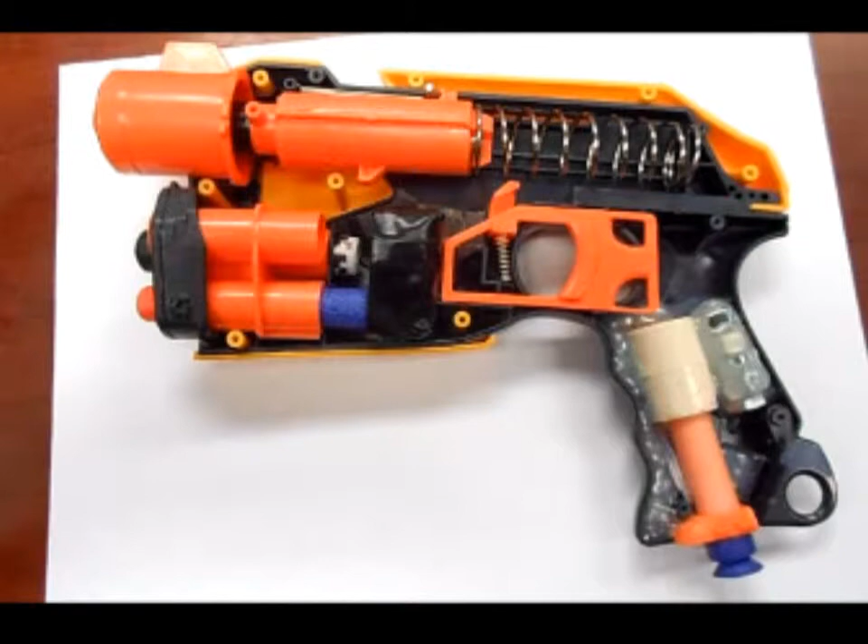Most of my how-to videos are taken while I'm doing each individual step, and then I put them all together into compilations later so you can see step by step how I progress from one step to the other and complete the entire blaster. In this particular case, this mod was done well before I ever started recording videos, so I'm taking it apart and reverse engineering the project I did.

I want to point out two things. The dart tag line is known for having extra plastic shells on the blasters. Once you remove them, other screws tend to be hidden below them. Underneath the priming slide is a screw you have to remove, as well as one up here under the forward piece of plastic, so you need to make sure you take those out as you go through this blaster.

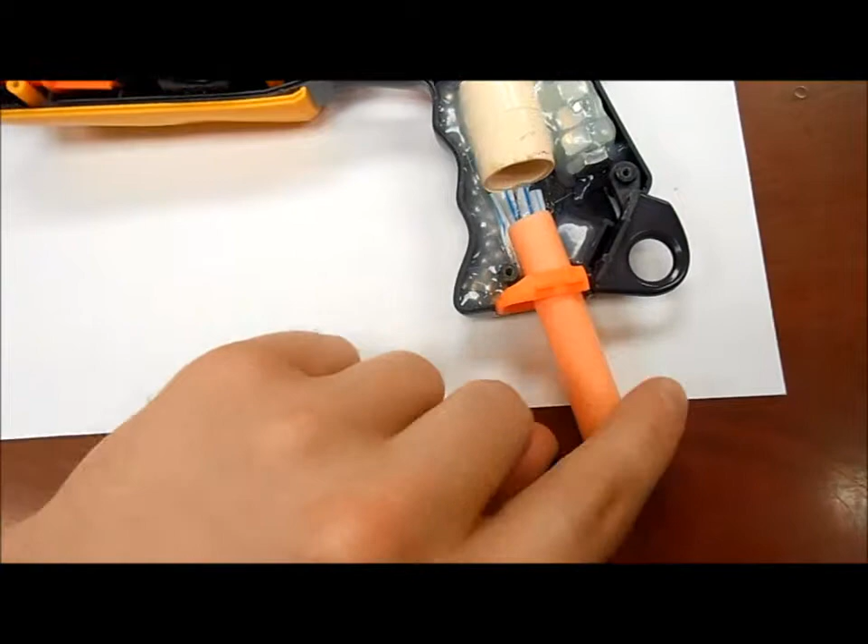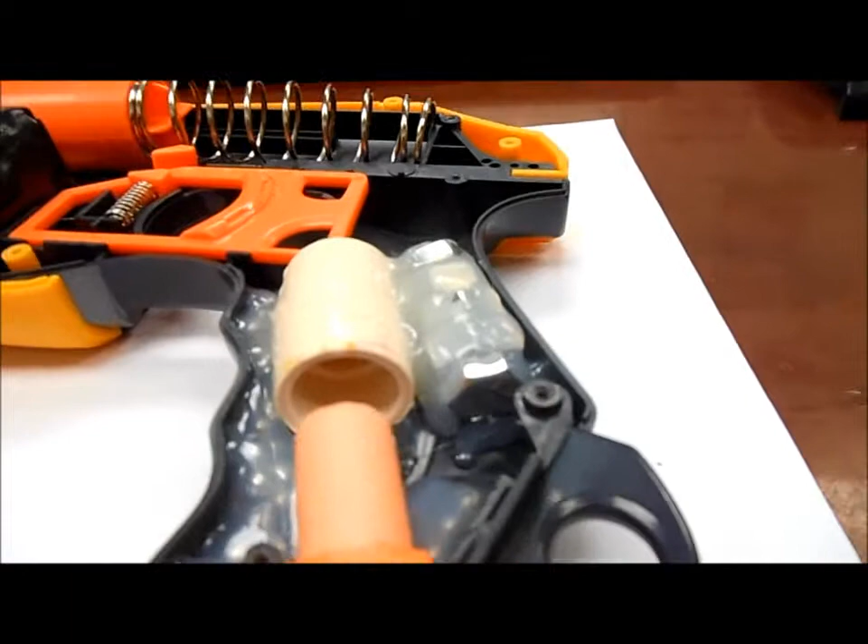I'm removing the shell on this side of the blaster, and now you have a look at the internals. In a lot of ways this looks just like it's stock, but there are a couple of obvious things you see immediately. First, here you can see I have a PVC coupler, and when I put this Raider dart holder on here I needed some way for the dart to actually be retained in the back and guided into the handle so I could put it in and take it out easily. You can see when I put the dart in, there's a ridge on the inside of the coupler that I have to push the dart into, and because this is slightly misaligned with the hole here in the dart holder, it actually pins up against the edge of the dart and holds it in there.

Additionally, you can see I put in some little straws. This looks so awful, but I put those in there so that I could make sure the dart doesn't get stuck on the lip here by hitting the side.

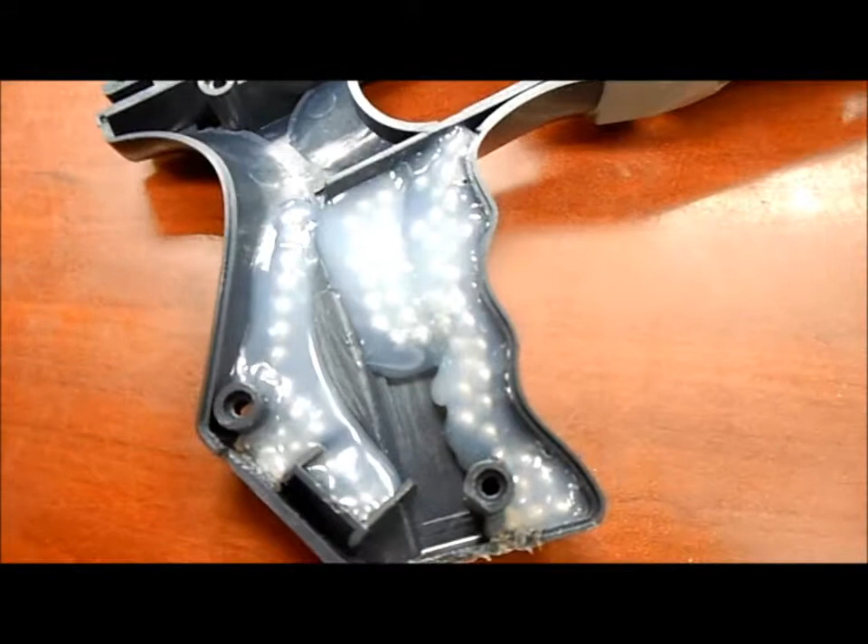Here I have a bolt with some nuts on it that's held in with hot glue, as well as a lot of stainless steel BBs. If you look at the other side of the shell, I filled in just lots of space in the handle with the steel BBs, and that gives it a real nice weight to the handle.

Also, you can notice up here, I greased the running rails for the plunger tube very heavily. Moving back over here, alright, so that's the handle.

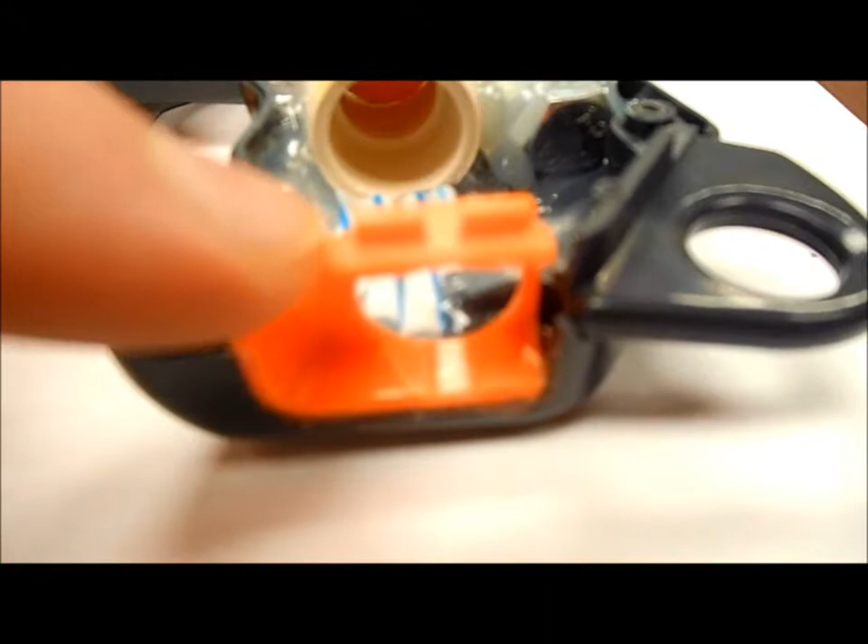I'll also talk to you about the dart holder. I cut a hole exactly the right shape for this dart holder, and then I only attached it on one side. The other side has rubber cement just applied and left to dry, so since rubber cement's kind of squishy, it creates a pressure hold against this part of the dart holder when the two shell halves go together.

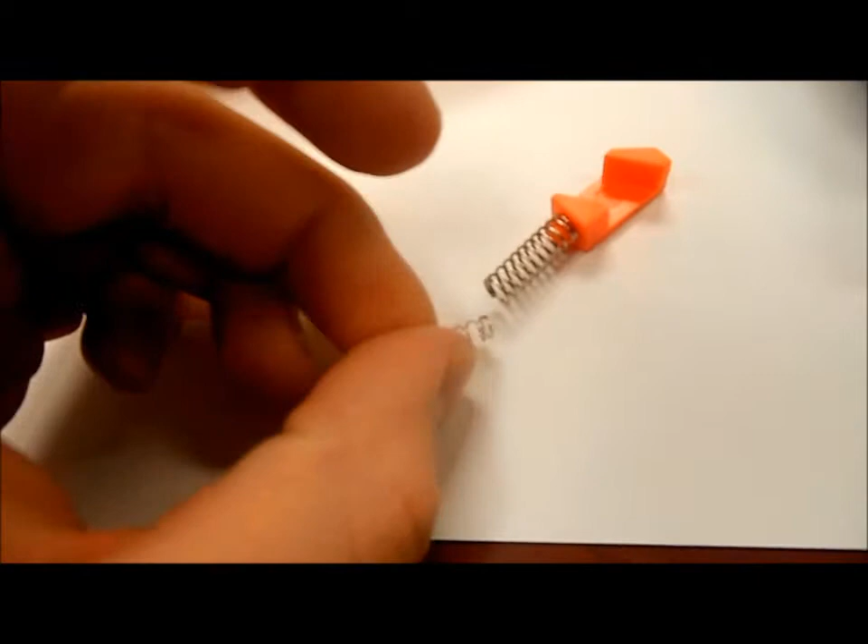Moving on up, here you can see the trigger. This is how the catch works, like that. The trigger I haven't touched, but the catch, as I mentioned before, I added an additional catch spring. It already has a very strong catch spring, but you know me, I don't leave things to chance. I back everything up with redundancies. So there's a doubled up catch spring.

I didn't grease that up, but I probably should.

Now the dart holder. You can see in this wall that I dremeled holes, and those are there to allow the darts to pass through the wall that holds the retaining wall at the back of the dart holder. However, the darts could fall through. You'll notice this isn't a stock piece.

This is a wedge that I made out of electrical tape, packing foam, a sheet of packing foam along with 2 sheets of craft foam sandwiched together, wrapped it in electrical tape, and I put a little ring of electrical tape in there. I'll take this out.

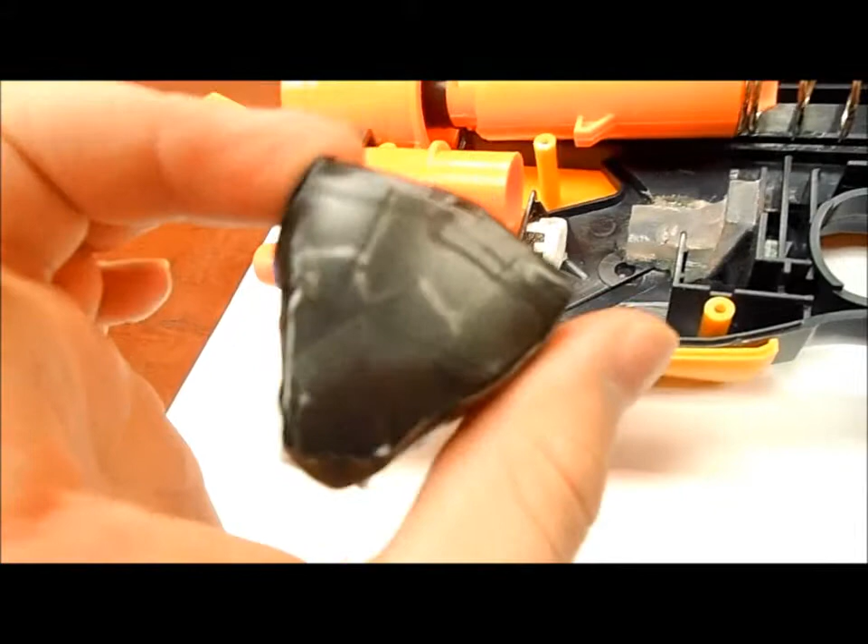That just kind of holds it in place a little bit, as well as pressure and friction, because this is a little wider side to side than the blaster itself, so it gets squished down, and that holds it in place. Without it, you can see what would happen to these streamline darts - they just fall in there, and then you can't get to them. So I will remove the dart holder now, and I'll also show you one other problem as I go along.

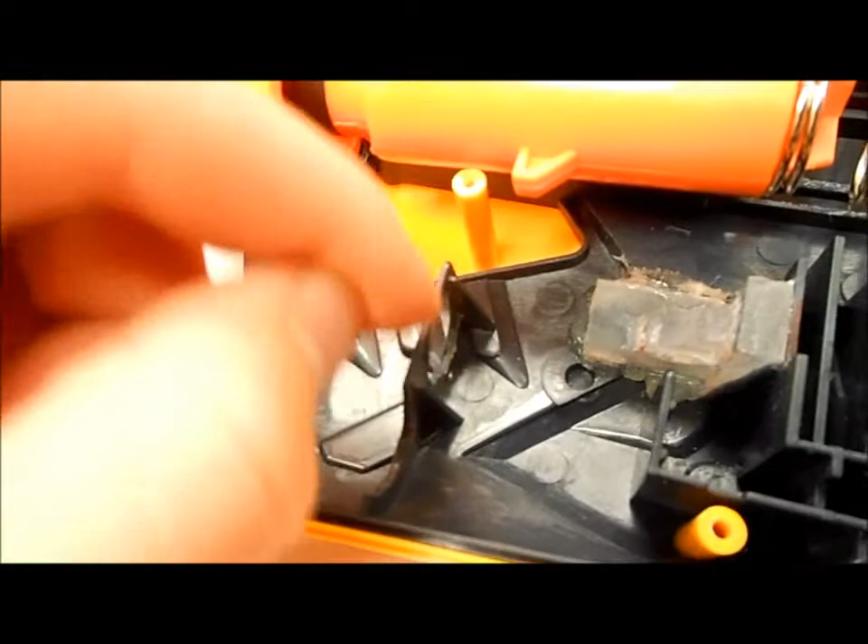Because of these holes that allow the darts to go through, if I try to pull the dart holder out, it gets hung up on the dart. So I have to pull the dart forward, and admittedly I should probably just go and chop this off, and that'll solve that problem. With the other half of the shell, the one that comes off right here, I have damaged 2 darts.

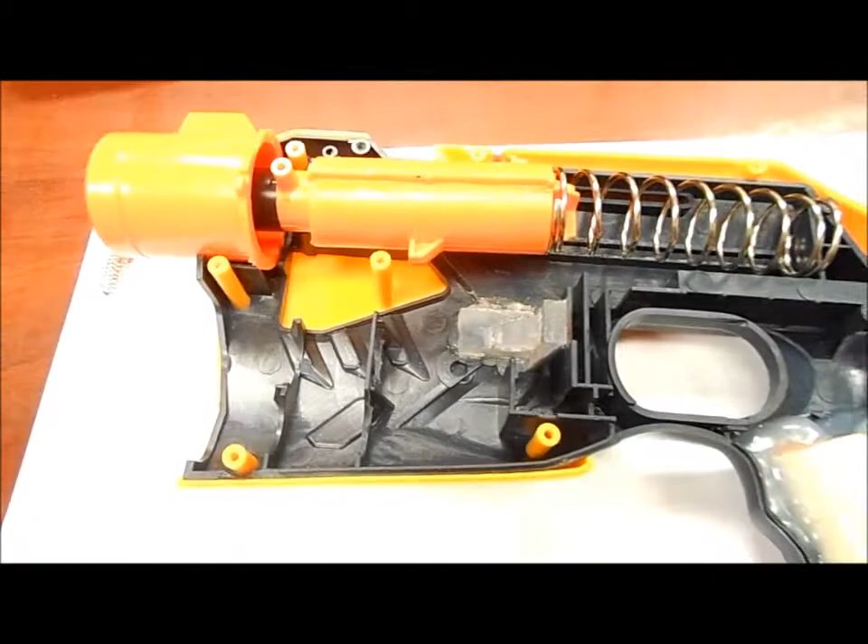One was in the dart holder while I was taking it apart, and so it would catch. And then another when I put the blaster together with the dart in the holder, and it got crushed as I tried to put this half onto the other one, and the dart got crushed at the back. So I should really just start assembling and disassembling this blaster without the darts in.

Next thing you'll see, this is a very powerful spring from Orange ModWorks - 6 kilograms of force in this little blaster. And so when this is assembled, all that force, when the spring is compressed, goes into...

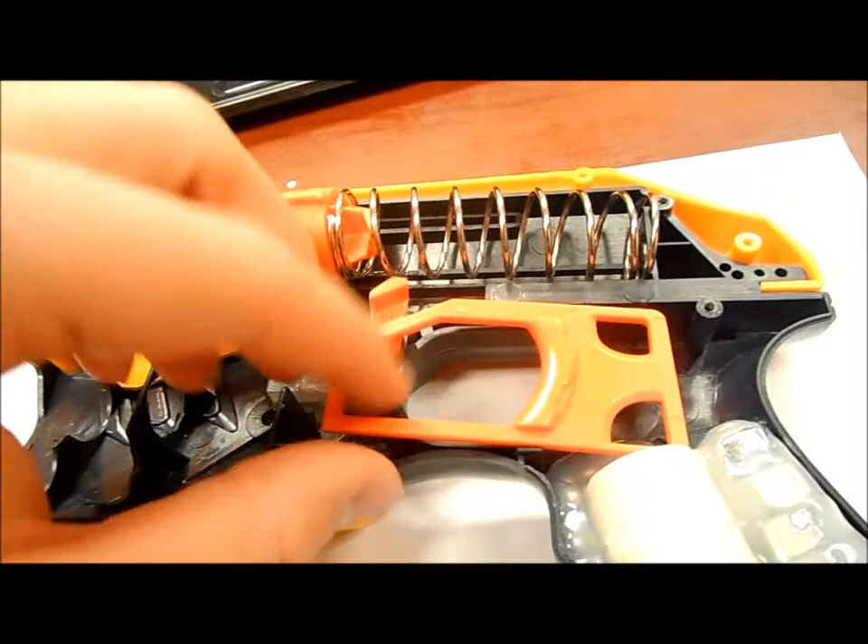...down this little plastic wall right here. So I built something here to hold that wall in place, to reinforce it.

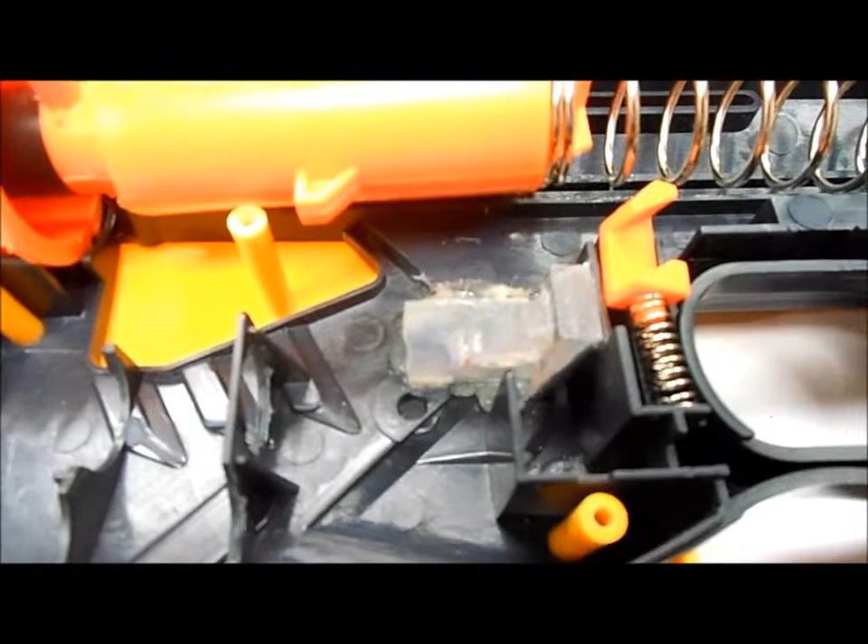Now I'm going to have to, because I'm not able with the software I use to overlap images with my own voice, probably pause periodically throughout this video to put pictures up to show you just what this looks like, because my camera doesn't record well close up during video mode.

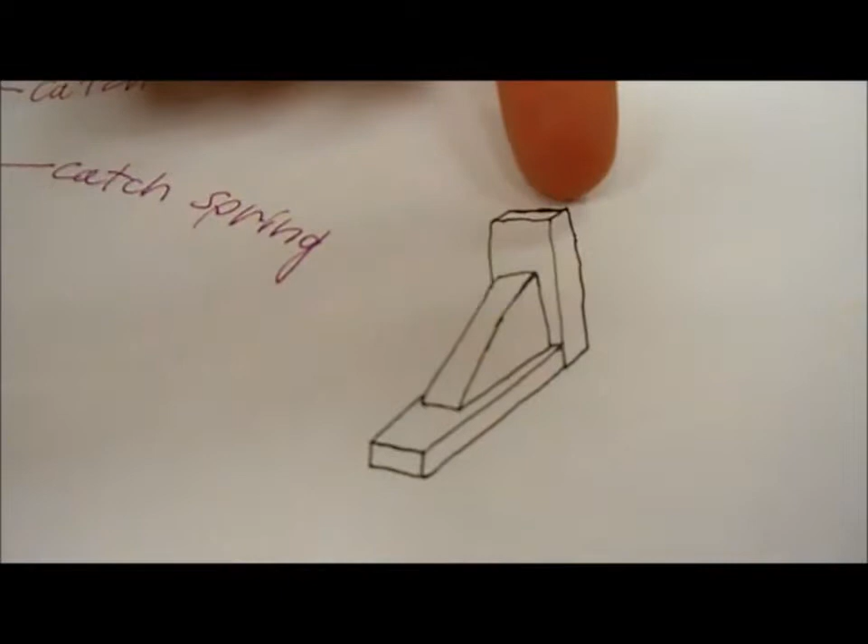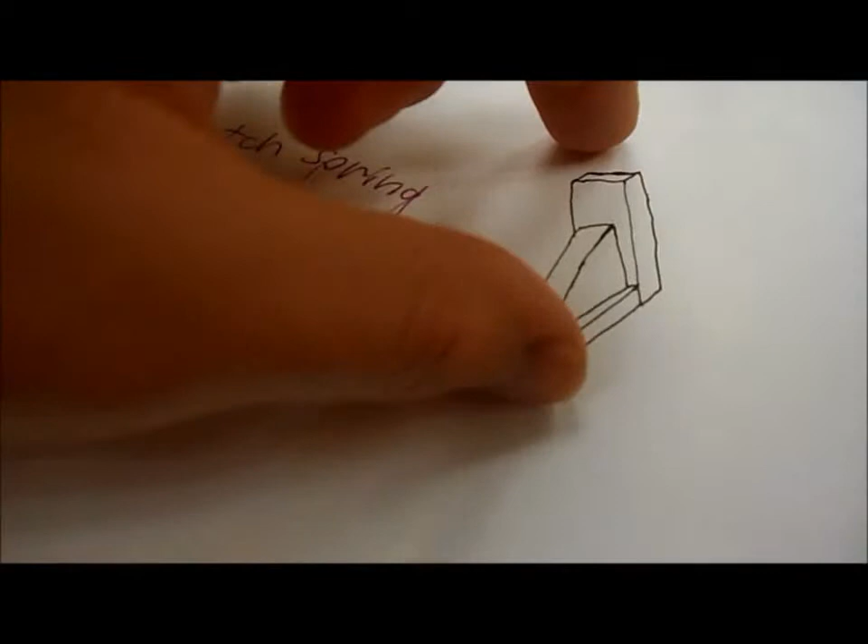Additionally, just to help my audience, I made some illustrations here. This is how that reinforcement looks. You can picture the wall being on the other side. And you can see with this design, which is made out of very precisely cut pieces of plexiglass or polycarbonate - I honestly don't know which - I am distributing the force of the spring onto the shell.

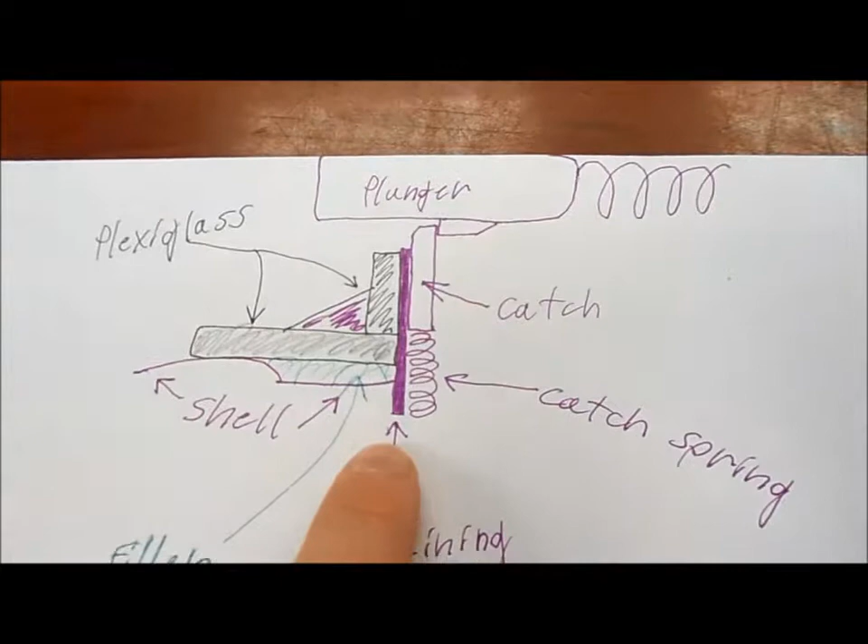So over here, I've got a little bit of a better drawing. Here we've got the plunger and the main spring. We've got the catch spring, and this thin little retaining wall that's plastic. It's part of the shell, but it's not all that strong. So you can see the shell has an odd shape here.

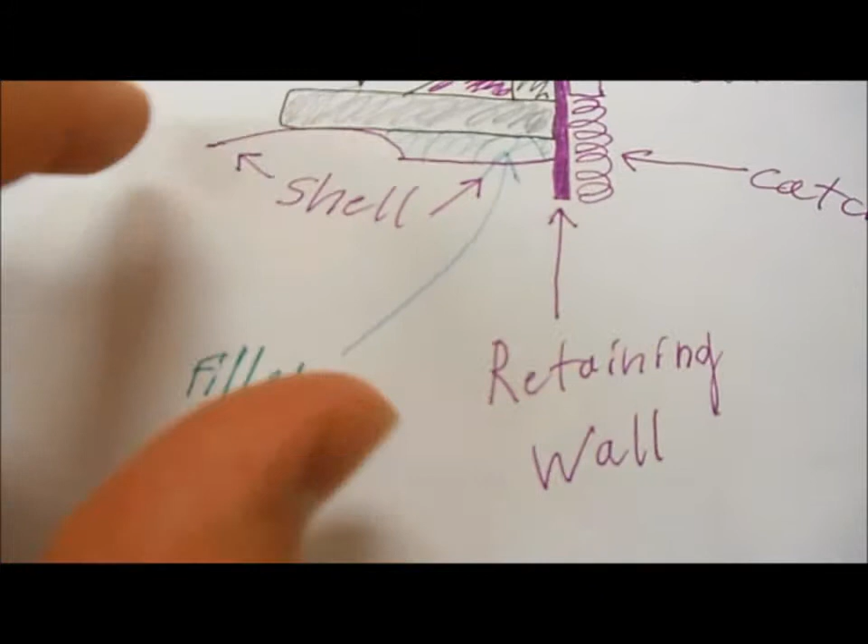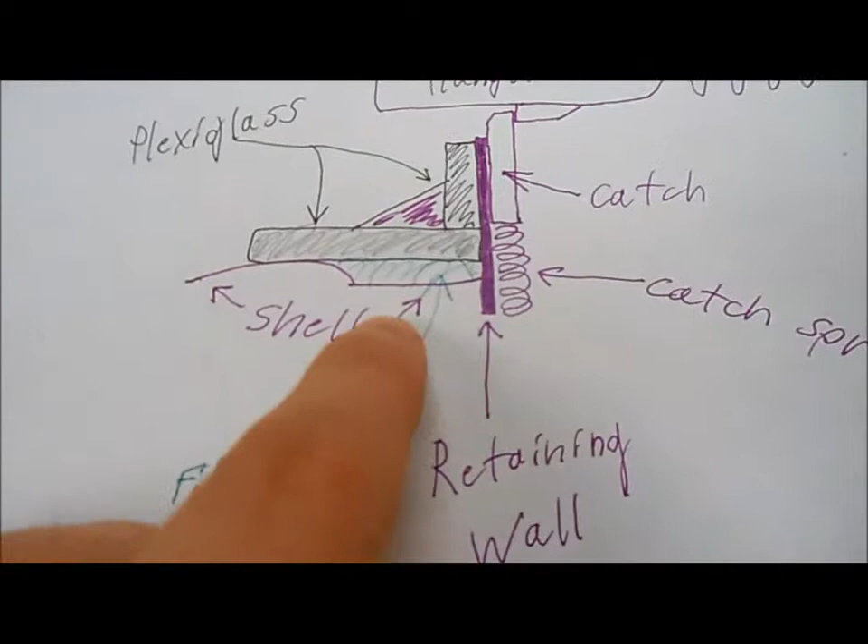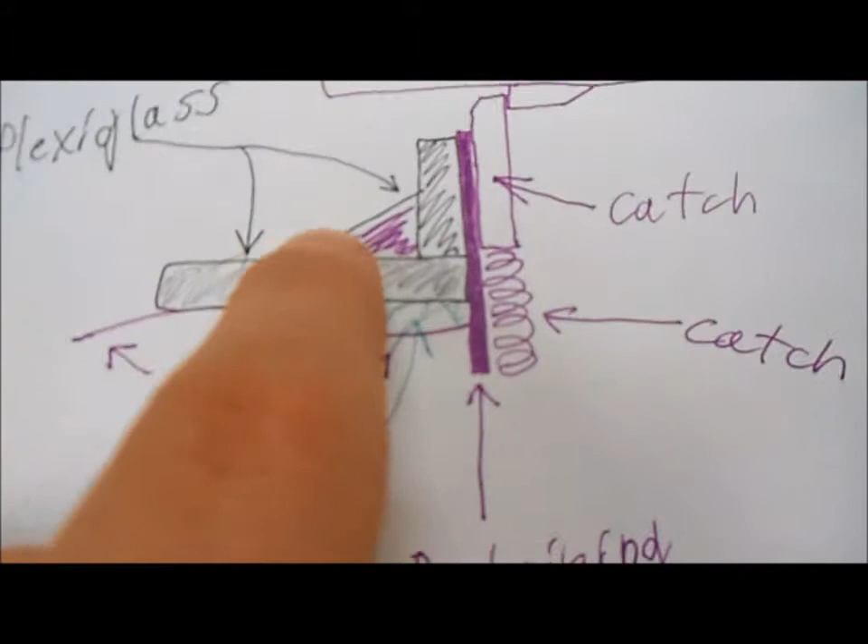So there's this gap that I filled in with some sort of rubber cement. That's the filler. Then I laid this piece of plexiglass down, used super glue to hold it down as well. Put this other piece of plexiglass up against the wall, and then I put this triangle in here to redistribute the force and just reinforce the whole thing, all held together with super glue.

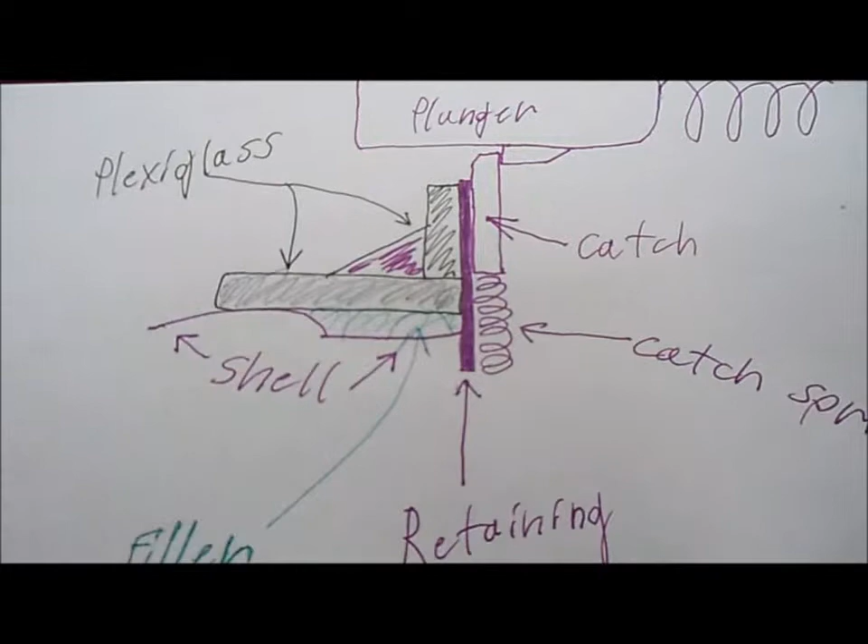And this has held up very well. I have very little doubt as to the durability of this design. It's a simple little mod, but one that I have found incredibly important for having such a strong spring.

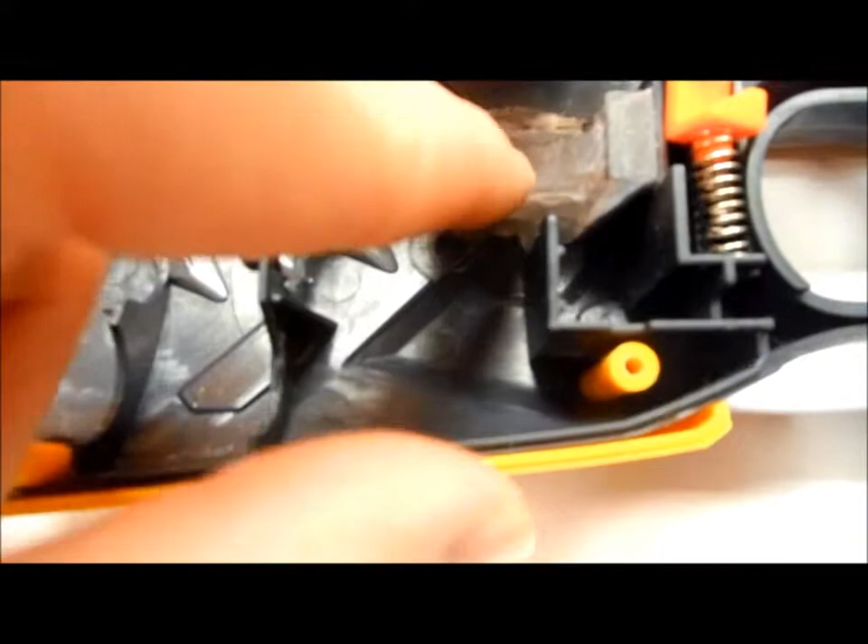I have also considered just overlaying this whole thing with some epoxy putty. But when I look at this, I'm really not too worried. I think it's holding up pretty well. I could be wrong. Still, I may go back in and touch this up a little bit later, but this...

...is really the heart of this whole blaster. This is the most important thing, because once you have something like a retaining wall break, it's very hard to fix it and reinforce it - it'll never have the strength it could have. So you always want to do your reinforcements before you have something break on your blaster.

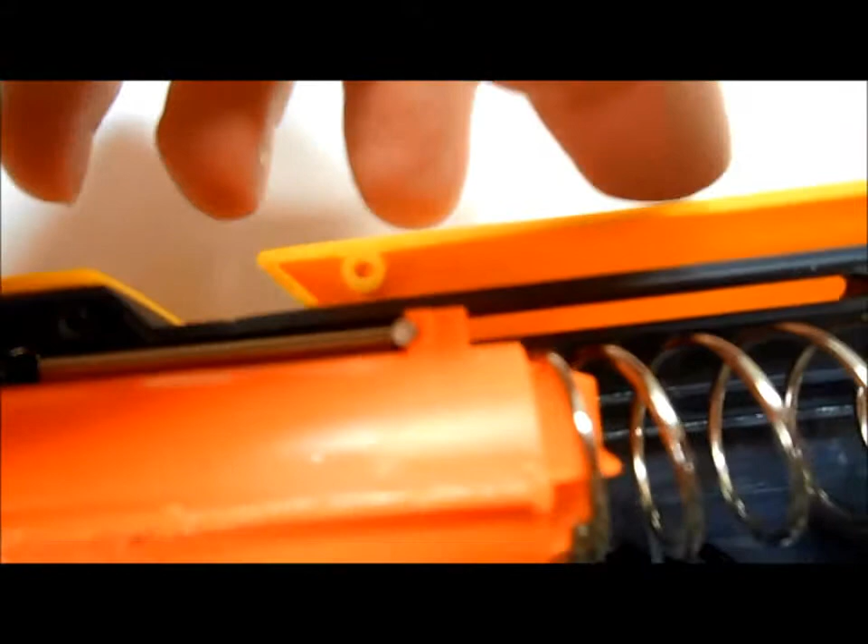So moving on, you can see the plunger right there is attached to the return spring, and the priming slide. Take the dart out of the barrel.

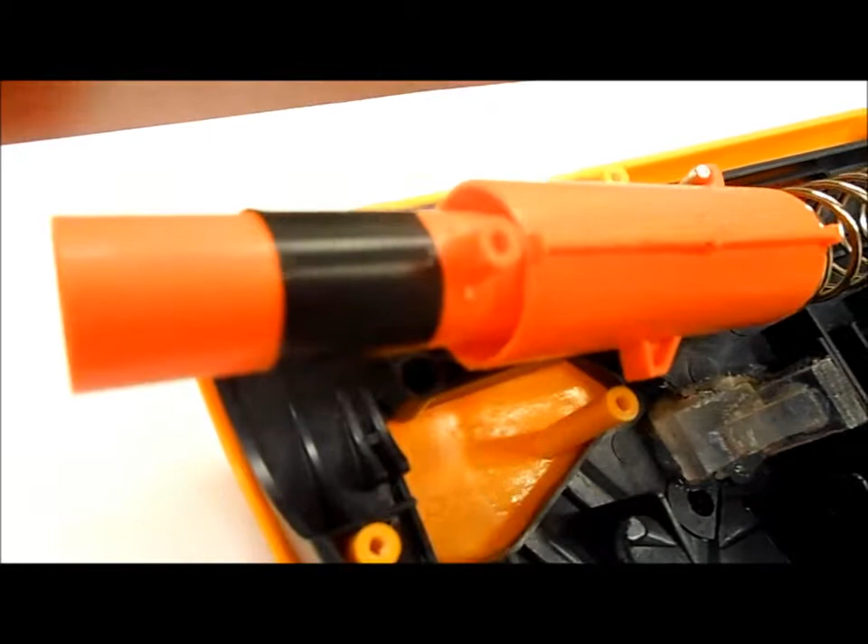Here's the muzzle, set that aside. You can see I sealed the air release holes just with a piece of electrical tape. I used a big piece because I wanted it to stay in place. And this plunger tube is very, very well greased.

Now I'm going to set the camera down for this next part. Originally, I had Teflon tape under the O-ring very thickly with several layers, and it made it very hard for the plunger tube to slide. So I only have one layer of Teflon tape under there, and I was trying to do the Teflon tape with a thicker O-ring. I think I just went with the Teflon tape and the stock O-ring, and I greased it heavily.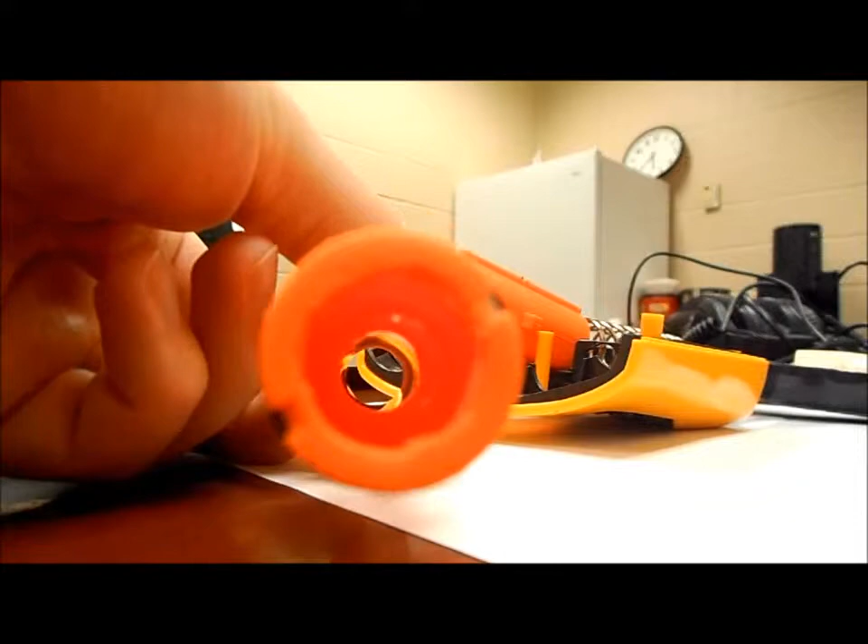Additionally, the air restrictor has been fairly cleanly removed, so it's a nice straight shot through the blaster.

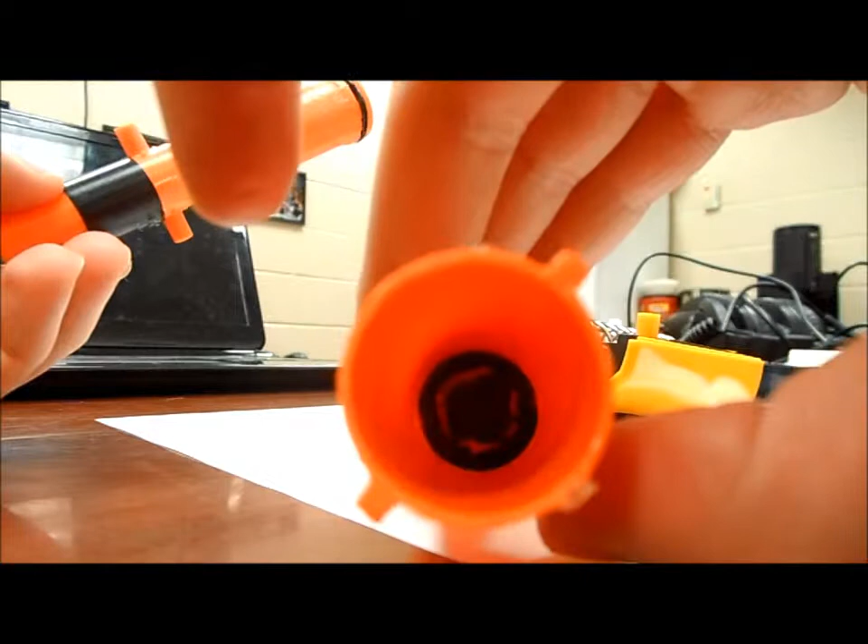You can see the black padding down at the bottom. That's padding from Oz Nerf Nerd. He sells a handful of cool Nerf aftermarket parts, minor improvement things like springs, aluminum reinforcing brackets that are very well machined for bolt sled reinforcements in the Longshot, and plunger tube padding for the Longshot for end-strike direct plungers and reverse plungers. I love his padding, it's purpose made. It served me very well, and it's working out very well in this blaster. I'm very glad it's in there.

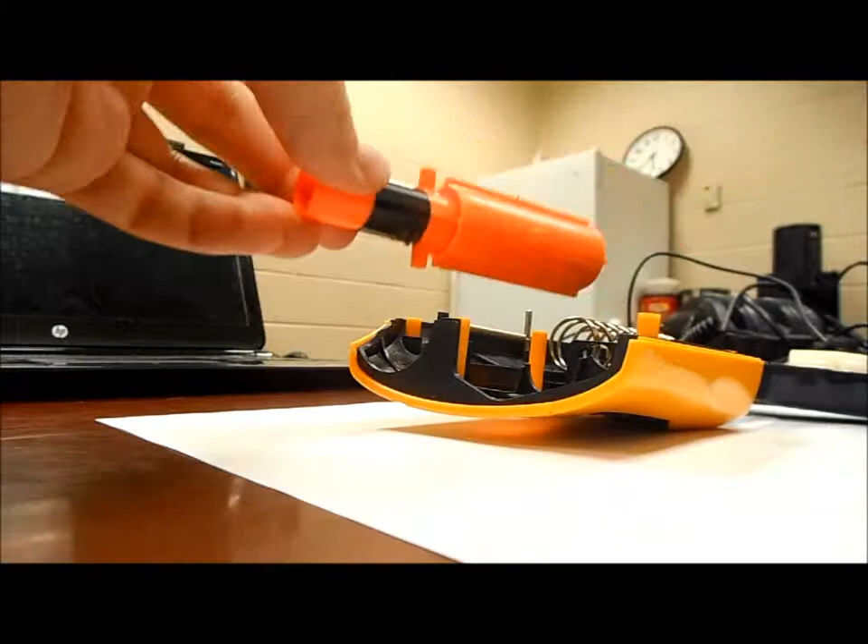Altogether, I think I've done a fairly good job of just improving all the functions of this blaster. Outwardly, it's stock in appearance except for the stock holder, and I'm incredibly pleased with this mod. It's the first mod I completed, except for a handful of Mavericks, that I came up with all the stuff on my own. I thought it was really, really well done. I was very pleased with the result. So this is a very important blaster to me.

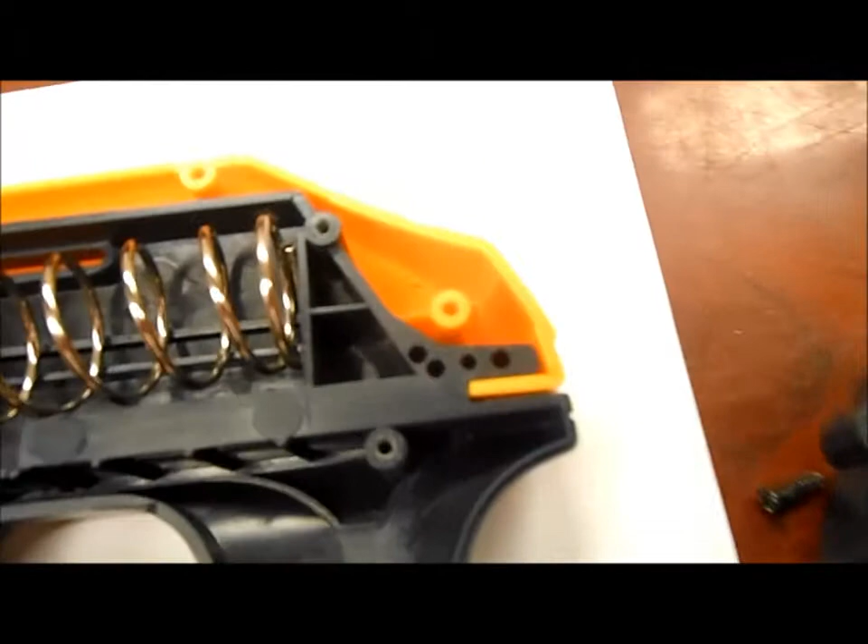At some point I'll probably go through here and chop out this piece of the retaining wall so that if I happen to have darts in here while assembling or disassembling the blaster, I don't damage them anymore. I thought of filling in this wall that the spring rests against, but it's got this support brace here and it's fairly sturdy, so that's not critical. But at some point, just because I overdo things, I may do that.

Touch it up, do some re-greasing, clean out some things, like I've got some plastic shavings here stuck in the grease. Maybe reinforce this even more, just because more reinforcement is better.

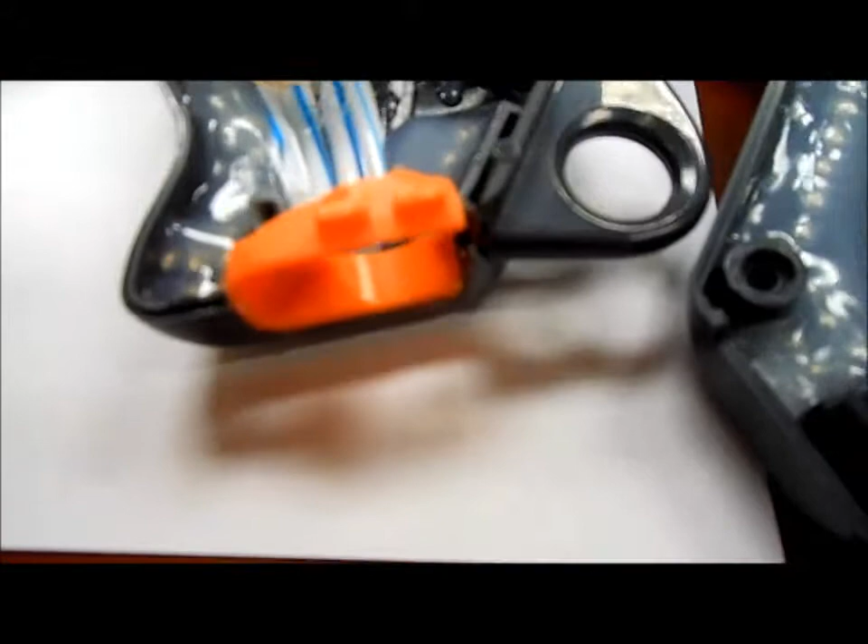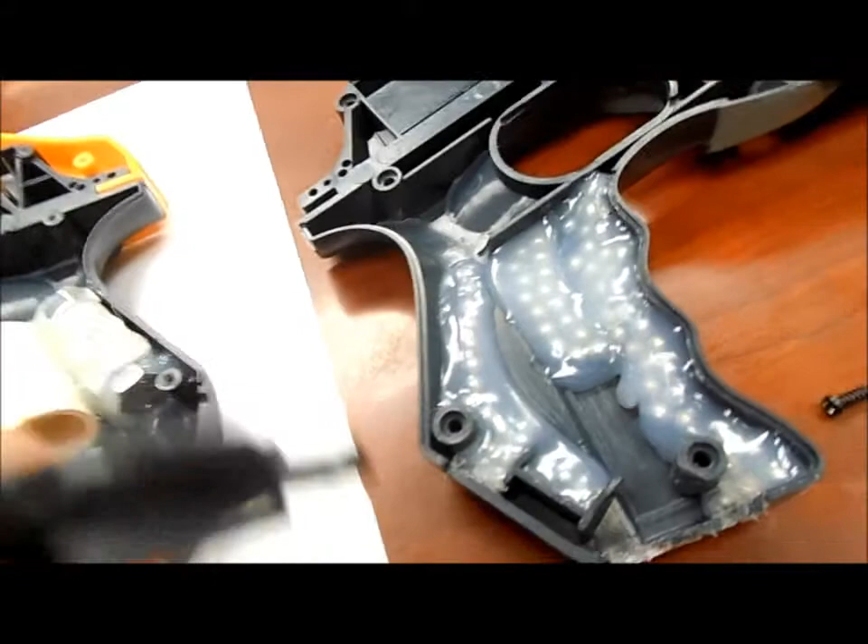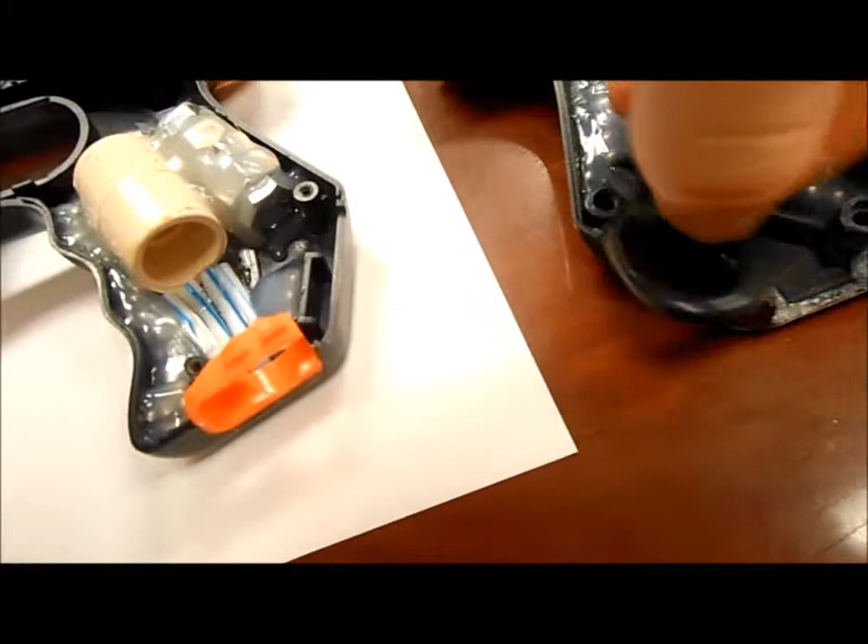The only other thing I have to point out, if any of you want to reproduce these mods, is you see this piece here? That's supposed to be something you can sling or attach to a carabiner or belt loop on the blaster. To make this fit into this blaster, after I filled in this handle with hot glue, I had to Dremel out part of it right up here. That's just so that when the shell goes together, it doesn't get stuck on the hot glue in there, and it just sits together very nicely. So that's a tuning thing I had to do to make it work just right.

I'm certain that's everything I've done to this blaster.